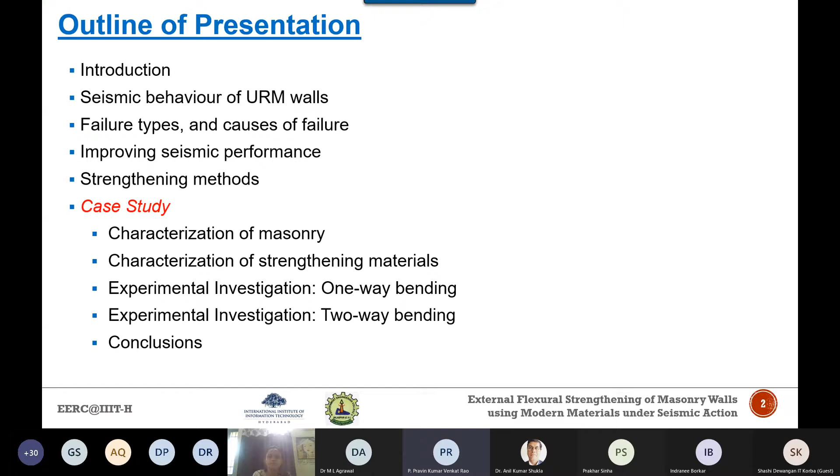We all know that since early civilization, unreinforced masonry has been the most widely used construction technique all over the world. Even today, despite the extensive use of modern construction materials such as concrete and steel, unreinforced masonry still represents a great majority of building stock in the form of residential, institutional, commercial, and public buildings, which also includes historical monuments and heritage structures of national importance, constructed all over the globe using unreinforced masonry.

In India, locally available materials such as clay bricks, adobe, stone units, concrete units, compressed stabilized earthen blocks, and even autoclaved aerated concrete blocks are most commonly used for unreinforced masonry construction. This masonry basically refers to a very vast spectrum of structural constituent materials and systems.

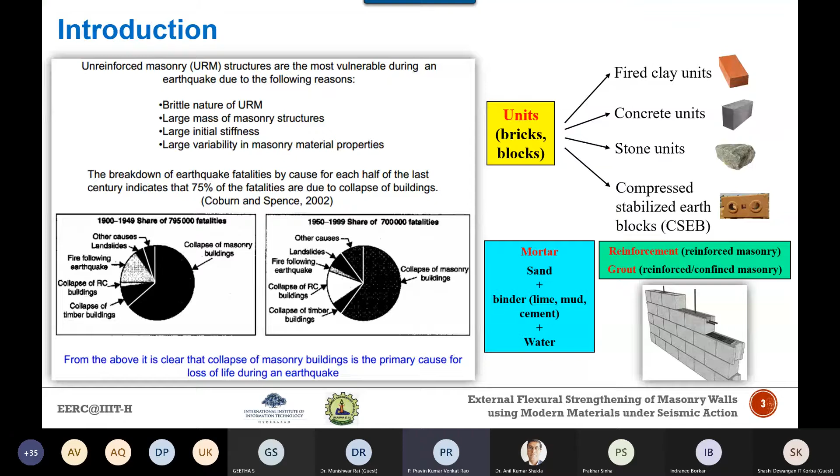Now, if you see, the majority of these constructions are made up of burnt bricks, stone masonry, or unburnt bricks. If you look at a country like India, 60 to 70 percent of our landmass sits in seismic zones 3, 4, and 5, which are called moderate to high seismic zones.

If you look at these structures, most of them will not have any seismic resistant feature. The earthquake resistance of this existing masonry construction in India is notoriously very poor, and therefore this type of construction is usually regarded as non-engineered construction. So in a country like ours, earthquake protection or risk reduction for the predominant majority of the population living in such constructions is really a big challenge. The existing housing stock of residential buildings, as you can see from building census data, constructed out of masonry with almost no earthquake resistant features, is really a worrying situation.

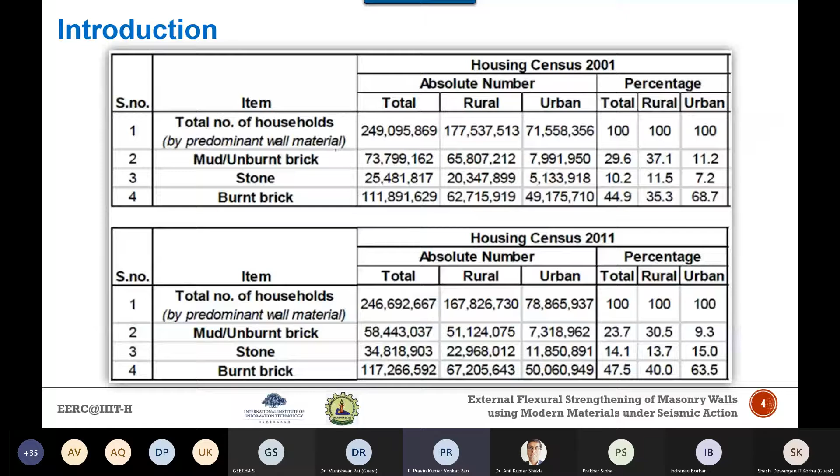Now if you see these masonry buildings, the main component is basically a load bearing structure. Let me tell you the basic difference between a load bearing structure and a frame structure. In the frame structure, we basically construct the beams and column framework, and all the masonry walls are considered as infill walls, or they basically act as partitions. The load is transferred from the upper floors to the beams, from beams to the columns, and columns to the foundation, where this masonry wall, constructed as infill material, does not contribute to any strength participation.

Whereas in case of load bearing structure, the load has to be borne by the wall.

I think it has stuck somewhere. Okay.

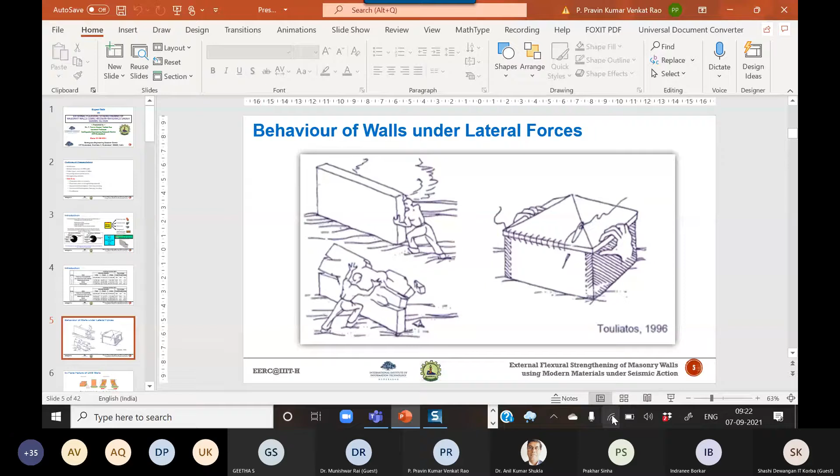As I was saying, the actual behavior of an unreinforced masonry wall during an earthquake is a complex combination of in-plane action and out-of-plane action. I will be explaining you this.

Now if you see during an earthquake, what exactly happens to a masonry building? During an earthquake, these unreinforced masonry walls may be either pushed sideways along their length or basically in the thickness direction.

The moment of inertia is a very good geometrical parameter that captures the bending strength. Imagine a wall, and if I take the bending about its x-axis, the moment of inertia comes out to be around T times thickness into L cube by 12. But if you take the same moment of inertia about the y-axis, it is around L times T cube by 12. Now if you take the ratio of bending strength about these two axes, you can see that IXX is almost 170 times more than IYY.

Considering an example of length of the wall as 3 meters and thickness of wall as 230 mm, this in-plane resistance of the wall is significantly larger because the depth of plane of bending in this axis is quite larger. So a person gets a lot of difficulty in pushing this wall about this axis.

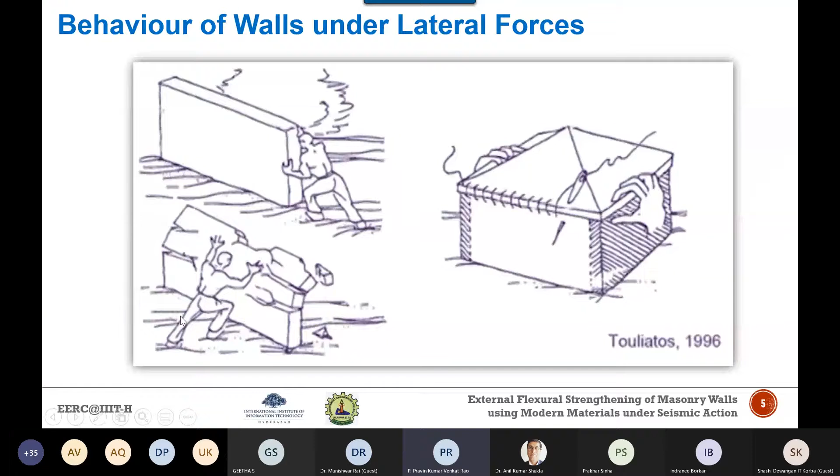This in-plane failure also depends on your aspect ratio. What is aspect ratio? It is basically the ratio of height to the length of the wall. This in-plane failure also depends upon your wall thickness, the compressive strength of your masonry as a material, the axial stress, and the pre-compression load, which is basically coming from the top stories.

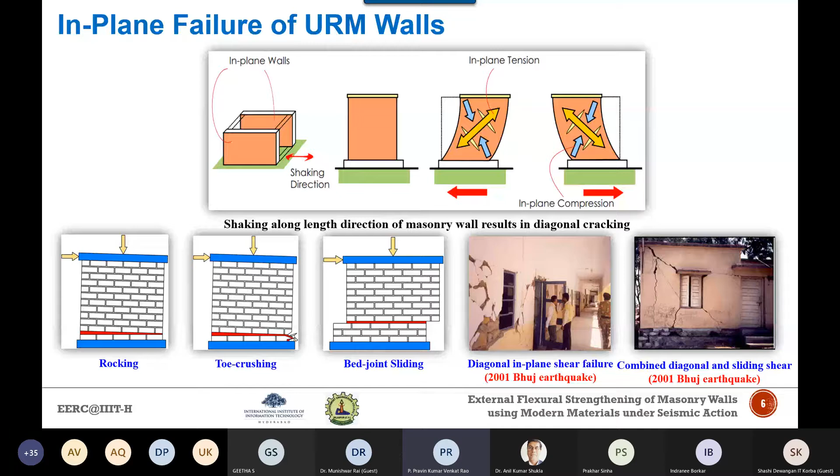Now, what is out of plane failure? When the direction of the lateral forces is along the thickness direction of the wall, the wall simply collapses. Why? Because the seismic resistance of the wall, by virtue of its weight and tensile strength of masonry, is very, very small.

Now, this out of plane failure is classified into two types. One is called one-way spanning walls and another is called two-way spanning walls. In case of one-way spanning, it undergoes uniaxial bending.

Just hold for a second. Yeah, sorry for the inconvenience.

So as I was saying, when the shaking is along the thickness direction, the wall simply collapses, as the seismic resistance of the wall, by virtue of its weight and tensile strength of masonry, is very, very small. This out of plane failure is classified into two types: it may be one-way bending or two-way bending, depending upon the boundary condition, which I will explain when I come to the case studies, how we define the one-way and two-way bending conditions. But at the moment, simply understand that this one-way and two-way bending is associated with the boundary conditions.

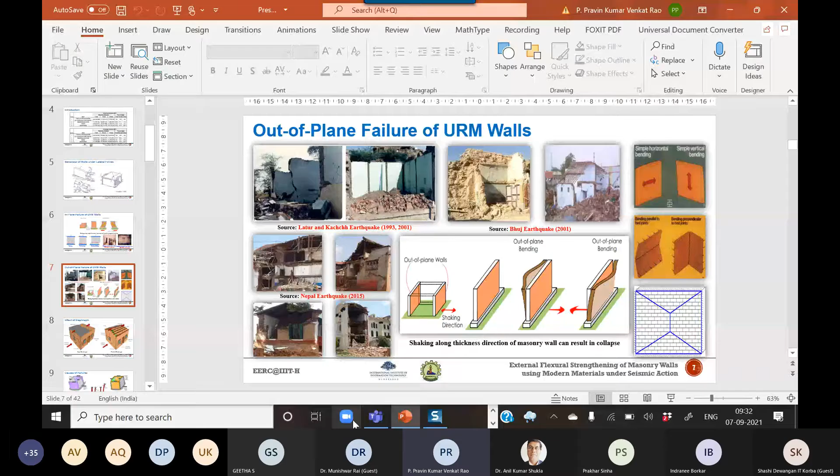Walls have especially failed in the out-of-plane failure mode. So whether you take an example of a Latur or Kachchh earthquake, or the Bhuj earthquake, or the Nepal earthquake, here you can see all the walls, when the earthquake or lateral force is in the direction which is perpendicular to the plane of the wall, cannot resist that particular force. That is because...

Here you can see that all the failure patterns show the masonry walls have been subjected to out-of-plane failures. Now let's move forward.

Now, these lateral forces which we have seen act in in-plane direction or basically in out-of-plane direction. There is also an effect of the diaphragm. In simple words, the diaphragm is nothing but the roof, or basically the floors. Now what happens is the seismic lateral forces basically originate in all the components of these structures, right? So it will be subjected to the vertical elements, that is my masonry walls, and second is my horizontal components, which is basically the roof.

And this component, there are basically two types of diaphragm: one is basically a rigid diaphragm, and another is the flexible diaphragm. The example of a rigid diaphragm is basically an RCC slab, reinforced cement concrete slab. And the best example of a flexible diaphragm is basically a sloping roof or pitched roof, which is not properly anchored to the masonry wall, and therefore it is flexible in nature.

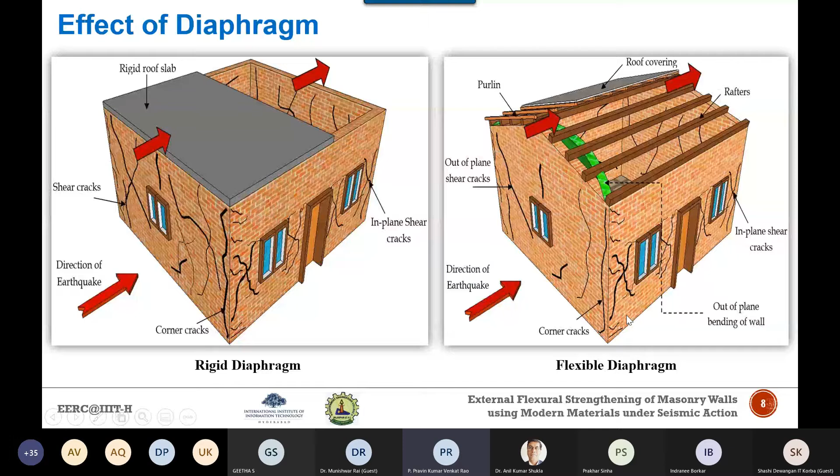So now let's understand what are the different causes of failures. We have already seen, let's understand in much more detail. If you see this horizontal inertia force, which is developed at the roof, it transfers to the walls, acting either in the weak direction or the strong direction.

Here I want to define, when I'm saying weak direction, it is basically the direction which is perpendicular to the plane of the wall. Let's say if this is my direction of earthquake shaking, and this force is perpendicular to the plane of wall B, then this direction is called my weak direction or the out of plane direction. Whereas when the same earthquake direction is parallel to the plane of the wall, wall A is called the strong wall or the in-plane wall, because it is much more stronger than wall B.

Now, another reason is, if all four walls are not tied together like a box, then the walls loaded in their weaker direction tend to overturn or topple. Therefore, to ensure good seismic performance, it is very much necessary that all walls must be joined properly together to the adjacent walls.

So in this way, if the wall is loaded in the weaker direction, then the weak direction walls can take advantage of the good lateral resistance offered by the walls loaded in the stronger direction. Further, the walls also need to be tied to the roof and foundation to preserve overall integrity. This is very important, and therefore several construction aspects are required to ensure this complete box action.

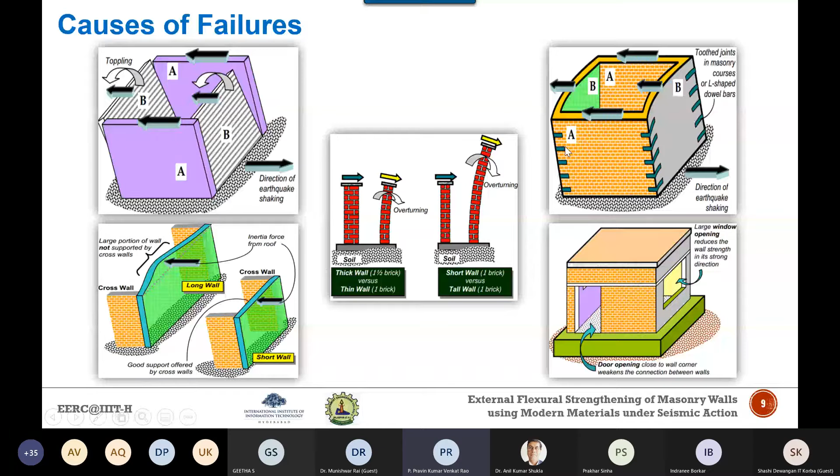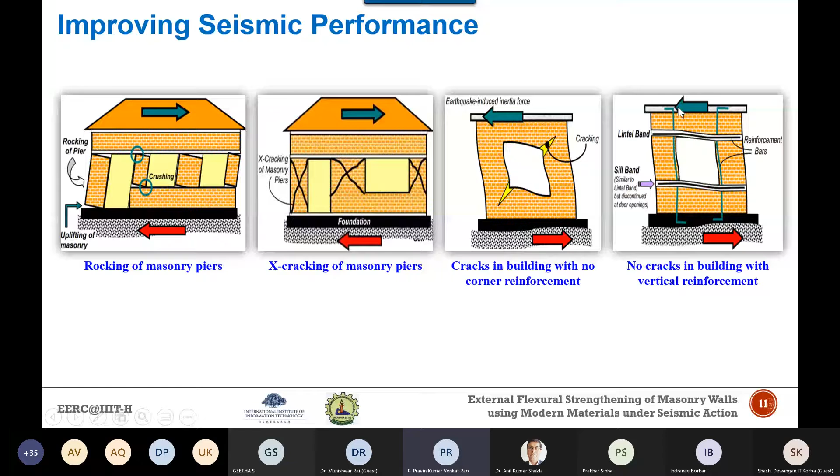But what about the existing buildings which have already been constructed in the past? What about their safety? You cannot embed the vertical reinforcement externally, you cannot provide the lintel band separately. For that, some special arrangement needs to be done, and for that, strengthening methods - external strengthening methods - come into picture, especially for safeguarding the existing buildings.

Now, a number of strengthening techniques using composite materials or modern materials have been evolved over the years to increase not only the in-plane but also the out-of-plane performances of the walls. In my case study, which I will be explaining later, I have focused on the out-of-plane behavior, but the same thing can also be assured in case of in-plane failures as well. The main function of providing this external strengthening is to enhance or increase the in-plane and out-of-plane performances of the wall.

And these techniques which have been used in the past, if you see, they not only enhance the strength, but also their deformation capacity and the energy absorption capacity of the walls.

So here you can see a polyester fiber, this fiber may be made up of different types of materials, like carbon fiber, glass fiber, aramid fiber, or natural fiber like basalt, hemp, sisal, cotton, or jute. These fibers are used as chopped fibers. When you use chopped fibers along with the cementitious matrix, the strengthening technique is called ECC, which means engineered cementitious composite material.

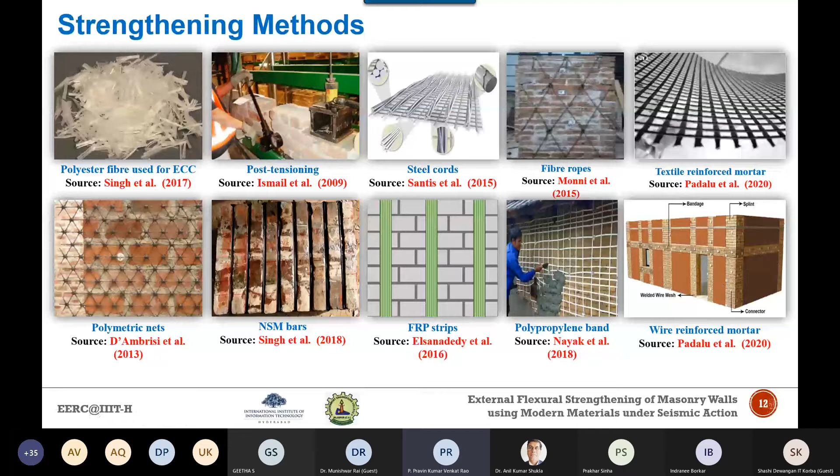So there are different techniques which have been used in the past. Now, in the case study, we have developed 3 effective and sustainable retrofitting techniques for unreinforced masonry buildings, especially for out-of-plane action. These 3 innovative, sustainable, easy to apply, and cost-effective retrofitting techniques have been tested, and their efficacy is validated using experiments.

Now, the first reinforcement which we have chosen is the welded wire mesh, this is a wire mesh, this is a fiber mesh, and another is the textile fabric. This wire mesh and fiber mesh has been used in conjunction with the inorganic matrix, meaning it may be a cement sand mortar, lime mortar, or any cementitious matrix. Whereas in the case of the textile, we have used a material called basalt, and in order to join this material to the masonry wall, we use a binding agent called organic matrix, which comes under the category of epoxy resins, especially epoxy hardeners.

Now, first we go to the testing of walls.

We have tested all the materials, and then characterized them at the component level, and then we will see at the structural level what tests have been done and what will be the strength difference between unreinforced and reinforced masonry. Then what is the strength enhancement, what is the deformation enhancement, what is the energy absorption capacity, that we will see in a while.

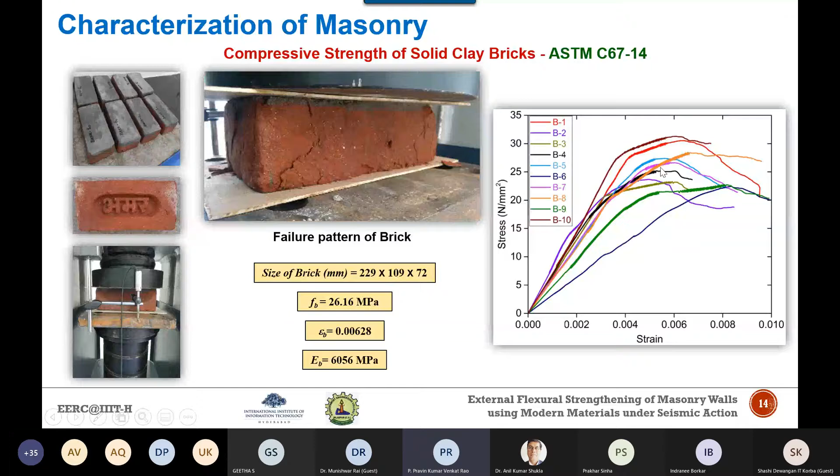It is simply the secant modulus. We took 33% of the ultimate strength, and then took the slope between 0 and that 33% of the compressive strength. So whatever value we got, the slope of that line gives you the modulus of elasticity — I'm referring to it as the secant modulus.

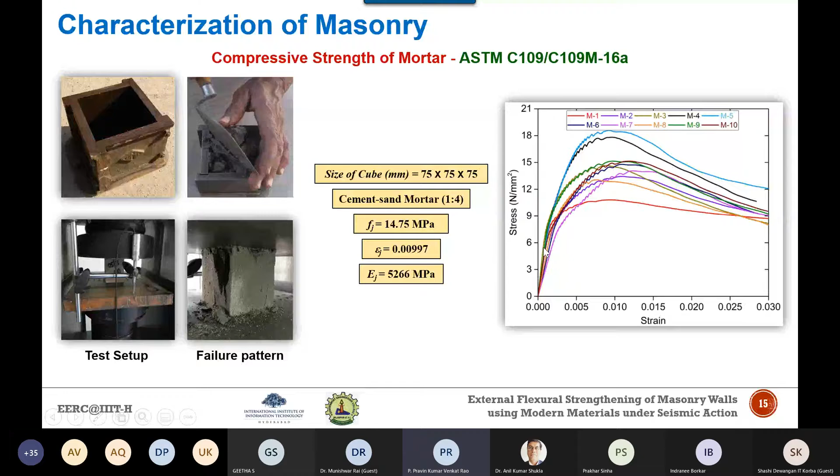Now next is the masonry. As I said, masonry is an assembly of a unit and mortar together, whereas in constituents we tested brick separately and mortar separately. Now let's understand what the behavior of masonry will be in assemblage.

So these failure modes have been defined as per the guidelines of ASTM. In layman's language, mostly the failures are associated with vertical splitting cracks.

This ASTM standard classification, identifying the local variation in crack patterns and spalling in different tested specimens, indicates that the material is not homogeneous. It is basically a heterogeneous material, with large variability in material properties, especially in masonry. So when we tested a masonry specimen of H/T ratio of 2.38, we got a compressive strength of 7 MPa, and the modulus of elasticity is in the range of 3375.

Now let's see the summary. We tested bricks with strength of 26 MPa, mortar cubes 14 MPa, and prism around 7 MPa. It is usually said that the masonry strength should come in between the brick and the mortar cubes. But here you can see that the masonry prism strength is comparatively lesser than that of the brick unit and the mortar when completely assembled.

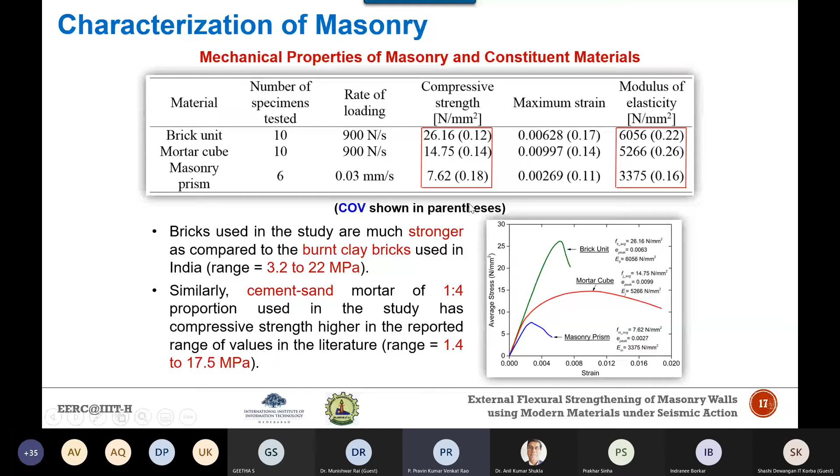Now, once we got these masonry properties, let's talk about the reinforcement. I talked about three different types of reinforcement: one is the wire mesh, another is the fiber mesh, and another is basically a fiber textile. Now let's understand the behavior of this reinforcement in tension, because this tension reinforcement is required.

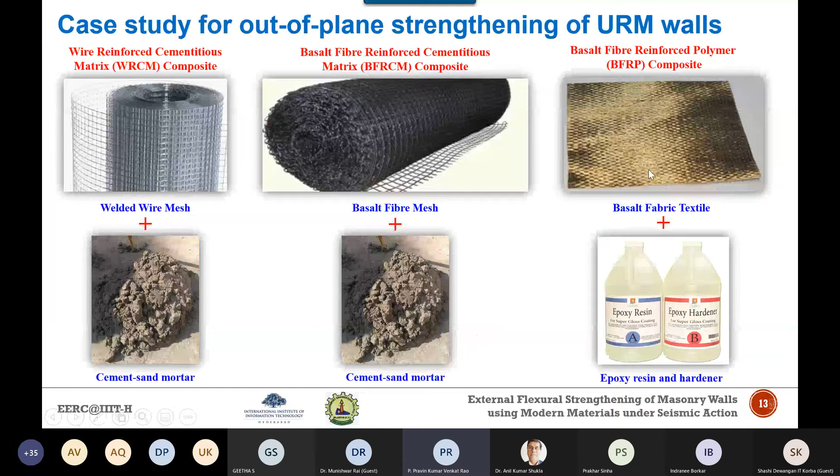As I said earlier, the biggest disadvantage of masonry is that it is very, very weak in resisting tensile strength. And in case of concrete also, why do we provide steel reinforcement? The main reason is to be more effective, especially in the tension zone, because concrete cannot take tensile forces — even if it can, it is in the order of 1/10th or 1/20th of its compressive strength. Therefore, we provide the steel reinforcement below the neutral axis.

Similarly, in case of masonry also, it is very strong in compression but equally weak in tension. Therefore, in order to enhance its tensile strength, we need to provide external reinforcement, especially in the tension zone.

Now we have tested 3 different types of materials. First is the bidirectional welded wire mesh, here you can see 2 grid spacings of 25 mm and 50 mm. Second is the bidirectional basalt fiber mesh, made up of basalt fiber yarns in warp and weft directions with 2 different grid spacings.

Now, according to AC 434 guidelines, you can see these brown color metal tabs have been bonded on both sides of the specimen, especially in the gripping zone, using an epoxy glue. This arrangement basically avoids damage to the specimen by the hydraulic grips in the test machine, and improves the stress transfer mechanism at the reinforcement mortar interface.

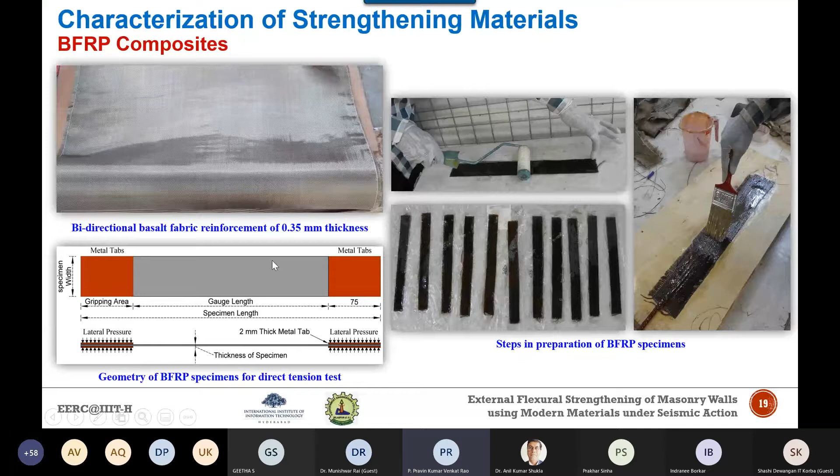Now let's come to the test setup and the test results. In the present study, clamp type grips have been provided to test the reinforcement and composite specimens in direct tension. These tensile forces have been applied using specially designed grips in order to avoid any slippage. So this is my wire mesh specimen, fiber specimen, then the composite specimen, and then the FRP specimen.

Now let's see the results. Here you can see these are the test results of the welded wire mesh and fiber mesh. From the stress strain curves, you can see that the wire specimens of the welded wire mesh have shown non-linear behavior, however with much lower ductility in comparison to structural steel and rebar, especially in case of the 25 wire mesh before the wires got ruptured.

Now, the fiber yarns of a roving have also shown linear stress strain curves and have got a brittle failure. Here in this curve, let me point, you can see there is a sequential load drop and again a regain in the stress strain curve, especially for this basalt fiber mesh. This is attributed to the progressive breaking of the individual fibers or yarns of a roving, and the difference in mechanical properties in the warp and weft direction is due to the influence of the weaving process.

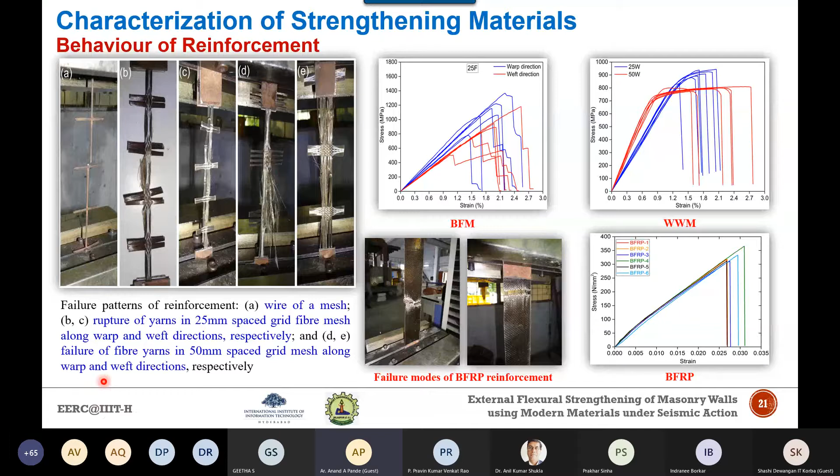If you see the FRP composite failure modes, the stress results of BFRP are quite repetitive and the stress strain curves are almost linear right up to the failure. Now next, if you see the test results, this tensile strength is basically obtained by dividing the load recorded by the cross-sectional area of the specimen.

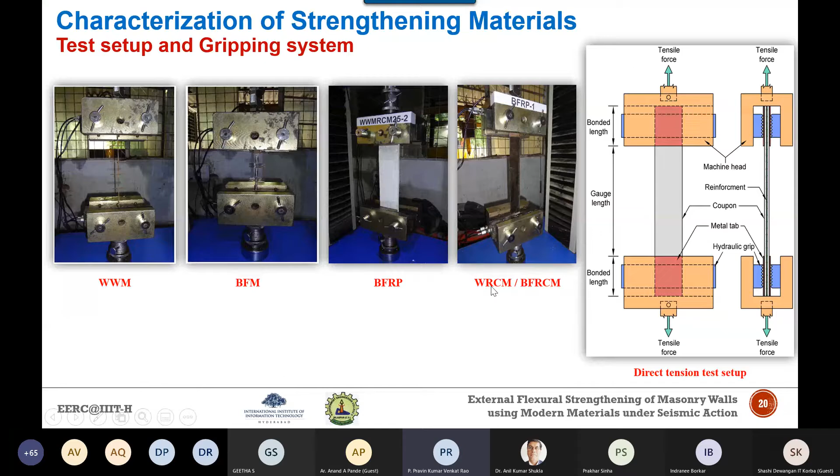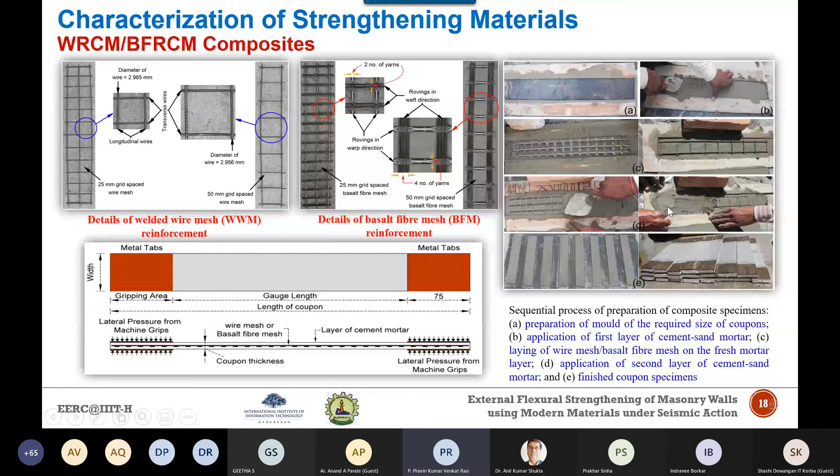Now let's see for the composite specimens. In case of wire reinforced, this WRCM represents the wire reinforced cementitious matrix. What is WRCM composite? This is the specimen where a wire mesh has been inserted between two layers of cement sand mortar plaster. Here you can see that the cracks have occurred along the width and have been distributed evenly over the full length of the specimen. But for a majority of these specimens, the failure has been caused by the sequential breaking of the wires inside the cementitious matrix. A very few specimens showed tensile failure of wires near the gripping area.

Here the blue lines basically show the test results of the dry reinforcement, whereas the red color stress strain curves, or the load displacement curves, represent the composite specimens. There is a reduction of 25% to 11% in strength compared to the dry wire reinforcement, whereas if you see the initial stiffness, they are almost in a very close match. So this reduction in strength can be attributed to the sequential failure of the multiple wires present in the coupons.

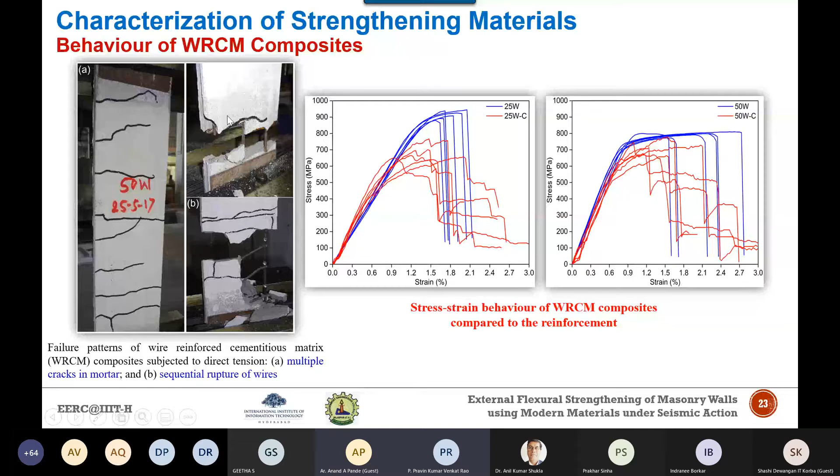Now let's talk about the same thing with the fiber reinforced cementitious matrix. In case of FRCM composites, in all the red curves compared to these blue curves, the slippage has occurred by numerous cracking along the width, which has been distributed homogeneously over the entire specimen length. The majority of the specimens have shown slippage between the mortar and the fiber mesh.

Except for one specimen, where the sequential rupture of the fiber yarns has been observed. The slippage is mainly attributed to the low bond strength of the interface between the mortar and the fiber mesh, and therefore there is a significant reduction in all the four stress strain curves. There is a significant reduction in the strength and stiffness of FRCM coupons compared to the dry fiber yarn, and this reduction can be attributed to the gradual slippage of the fibers.

Now we had talked about the compression behavior of the masonry and its constituents. We had talked about the tensile behavior of these composite materials, as a dry reinforcement and as a composite material, for the wire, fiber mesh, as well as for the FRP. Now let's apply this strengthening reinforcement to the actual masonry.

So for this, we have constructed two different types of specimens. These small specimens are usually called wallettes, W-A-L-L-E-T-T-E-S. These are not walls, these are wallettes, which are small size specimens.

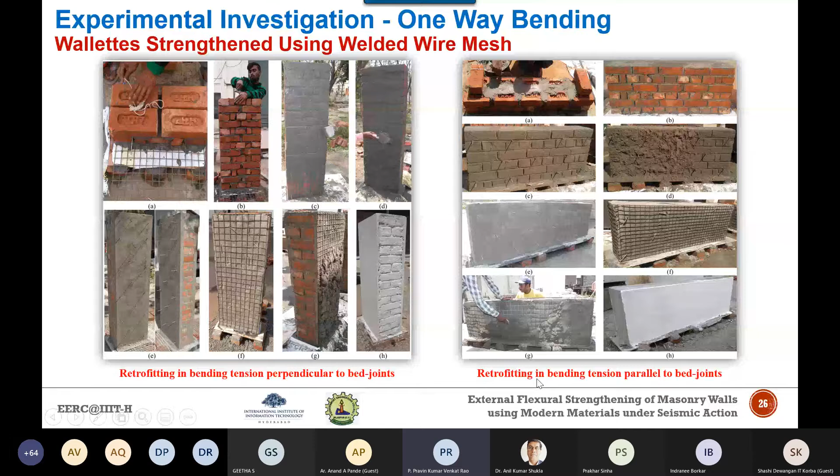Now, if you see the test results, we tested different types of specimens with varying reinforcement ratio. For bending tension perpendicular to bed joints, they failed either in sliding shear along the bed joint, or due to diagonal shear cracks joining the support and the loading line. Whereas some specimens strengthened with 50 mm wire mesh mostly failed in flexure, or in some cases sliding shear also took place.

So this shear failure—the sliding shear and diagonal crack patterns you are seeing—are mainly attributed to the fact that these were tested in horizontal position without any axial force, and the low shear span to depth ratio is also responsible for this shear failure. The main question is, when we are testing these masonry specimens in bending, why did this specimen fail in shear? In some cases there is flexural failure, but in others shear failure occurs. The main reason is the low shear span ratio.

It is interesting to note that the flexural failure is brittle. If you see the load displacement curves for flexural failure, they are much more brittle, whereas the shear failure has got some ductility. This is also related to how the strengthening reinforcement failed. This brittle flexural failure is accompanied by rupture of the wire mesh and can be attributed to a very low reinforcement ratio, resulting in a very shallow depth of the neutral axis. Whereas in case of shear failures, the gradual sliding has been resisted by the catenary action of the welded wire mesh, resulting in slightly ductile failure.

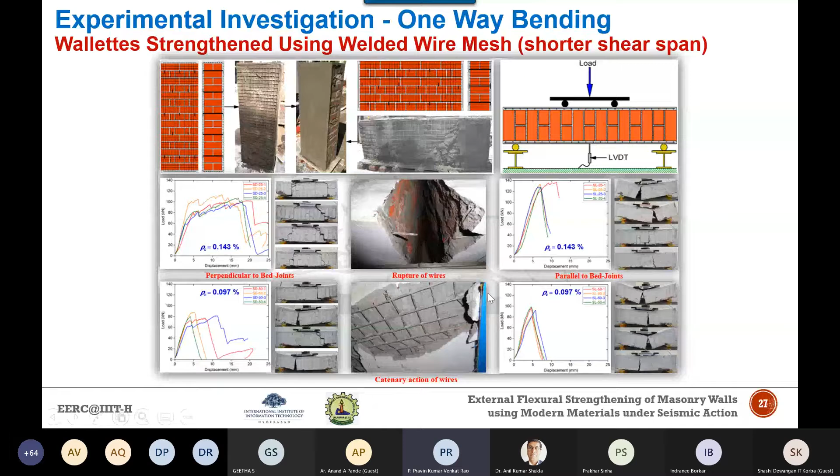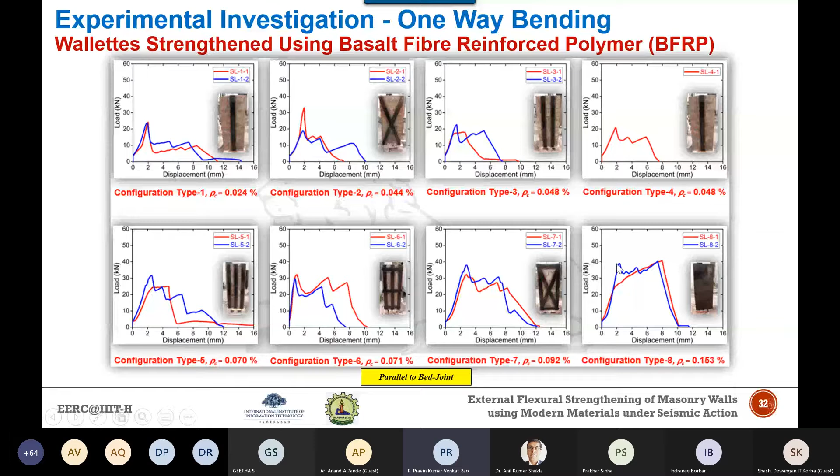But in FRP, three different types of failure modes have been observed. Either FRP rupture took place, attributed to relatively better bond characteristics, or debonding occurred. This is also a rupture failure. Here you can see that there is a debonding.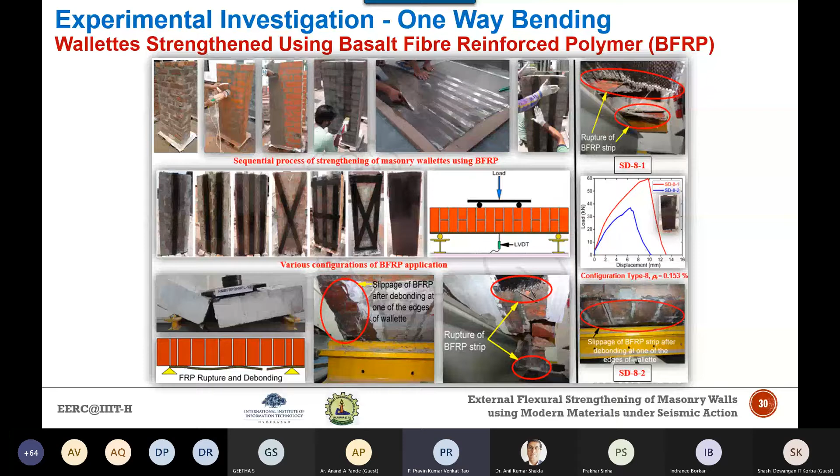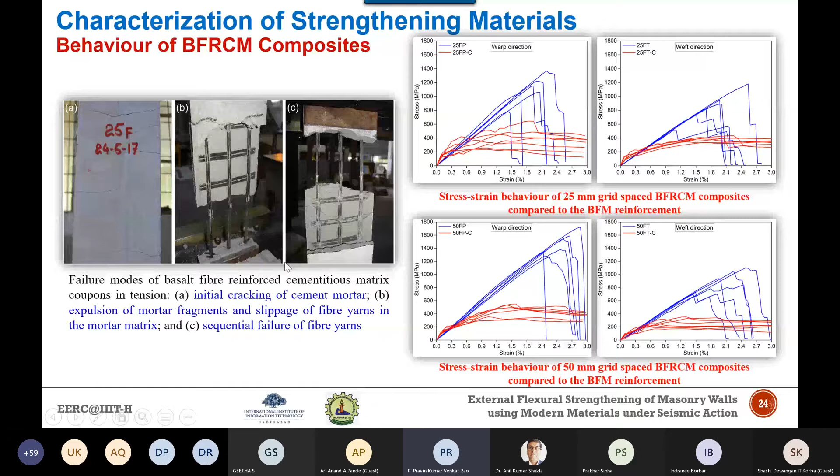All these specimens which I showed have been tested in 4-point bending. Here you can see there is no axial load, and therefore this is a case of one-way bending.

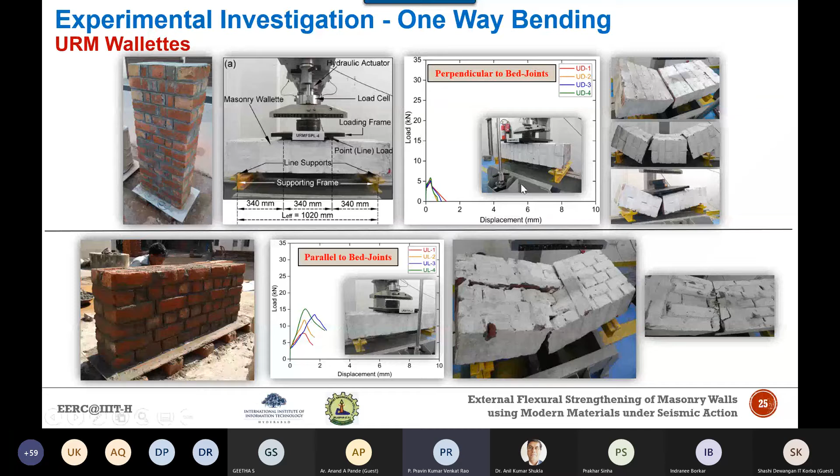Now let's talk about the two-way bending. This is very important, the two-way bending condition.

To understand this behavior of masonry walls, especially in two-way bending, this H-shaped masonry wall, a full-scale wall where the length is 3 meters and the height is about 3 meters, was constructed. This main wall and the cross walls have been interlocked at the junctions using staggered overlapping bricks, and here you can see the toothing connection has been developed.

So as we tested for the one-way bending with 3 different types of specimens, we have shown what the strength and deformability capacities are.

Now similar techniques have been applied at the structural level, especially on masonry walls, using 3 different techniques: one is the welded wire mesh, another is the basalt fiber mesh, and another is the fiber reinforced polymer.

Okay, so let's discuss how we have applied these and then we will go to the results. Now in case of the welded wire mesh strengthening technique, the masonry wall has been retrofitted using wire mesh.

Here you can see there is a first layer of plaster which has been laid along the length of the wall, similar to the lintel band which we discussed earlier, but the lintel band is usually provided especially for new buildings. For an existing building, we are externally providing these seismic belts.

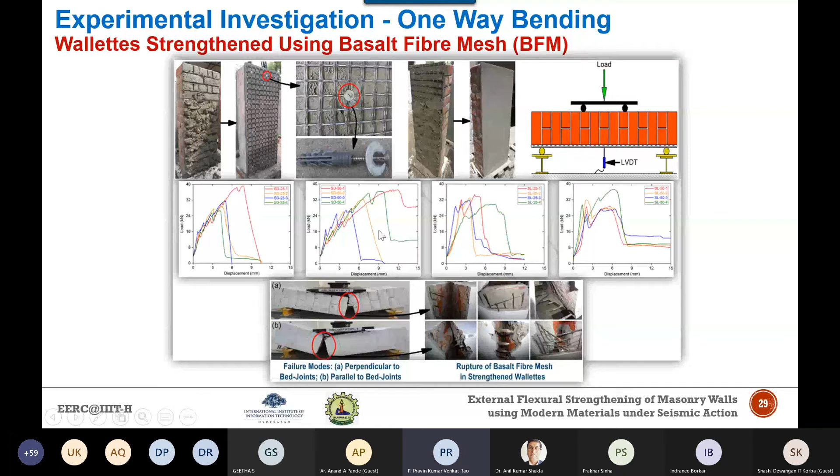Now in case of the FRP composites, the FRP has been applied on both faces of the wall, similar to that of the welded wire mesh, in form of a horizontal bandage at the lintel level, where we have provided a vertical bandage as well as the horizontal bandage. So the vertical bands or belts are specially called splints. The vertical FRP you are seeing is called a splint, and the horizontal component of the strengthening reinforcement is specially called the bandage. Here you can see the BFRP vertical splints and then the BFRP bandage.

In welded wire mesh and the basalt fiber mesh, we have used the inorganic matrix, cement sand mortar, whereas in case of the FRP, we had applied this strengthening technique using the epoxy resin and the hardeners.

Now here you can see that the test wall notations are suffixed by a letter F and the letter S. This F and S indicates the boundary conditions, especially at the top edge of the wall. The F is indicating the walls with integral support at the top, which is obtained by constructing an RCC slab by pouring the concrete directly over the wall. This represents my rigid diaphragm condition, which I had discussed earlier.

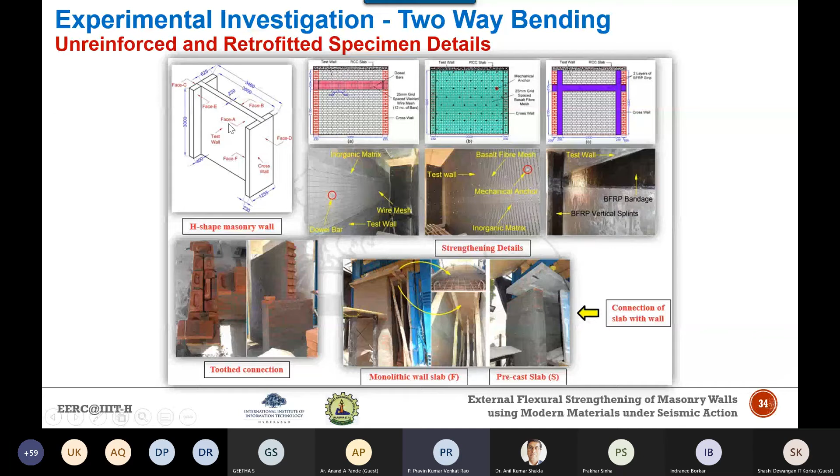Here you can see this is a reaction frame consisting of 4 columns which are connected by these steel beams in the loading direction, and there is a steel beam especially in the transverse direction. So 4 columns, 2 steel beams provided in the loading direction, and the two steel beams provided in the transverse direction.

All the members of this reaction frame have been connected using high strength friction grip bolts, and the columns have been connected to this concrete floor using these anchor bolts. Now here you can see that especially in the columns the stiffeners are provided, even in the beams the stiffeners are provided. The main reason is that all the points where concentrated forces are acting.

Now if you see, the lateral movement of the RCC slab at the top of the wall has been restrained using these 4 steel rods, between the slab and the reaction frame, and this hydraulic jack has been used to apply a pre-compression load from the top. And to distribute the vertical load uniformly in the test wall, a steel beam has been attached to the top of the RCC slab along the length of the main wall.

And this lateral load has been measured using S-type load cells, which have been attached between this backing frame and the reaction frame at the 4 reaction points. Displacements have been measured using 4 LVDTs, 2 at the front side of the wall and 2 on the other 2 ends of the wall. To minimize the leakage or friction underneath the backing frame of the applied load, the backing frame has been supported on rollers and ball bearings. And the lateral load, the most important part, has been applied using these airbags.

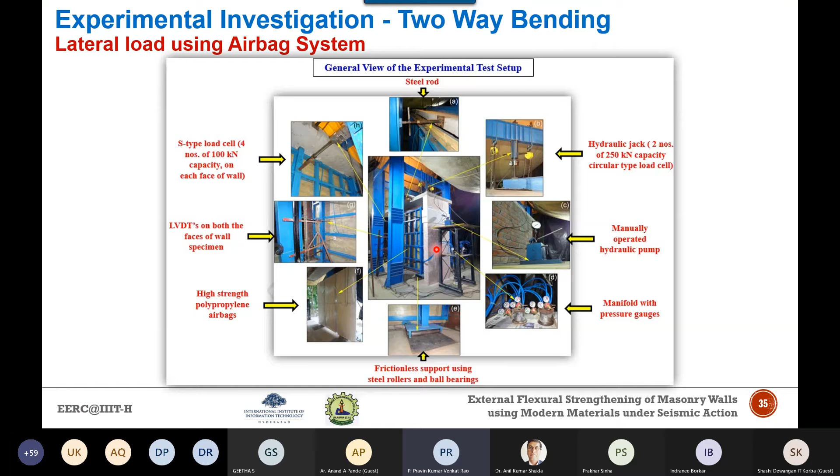Once air is passed onto these airbags, they inflate and apply a lateral load on this masonry wall.

The salient feature of this test setup is that there is a provision for application of pre-compression load, as well as a provision for application of uniformly applied load.

Here you can see this backing frame, and just beside it, 6 airbags have been applied. This backing frame is placed very close to the wall so that the airbags inflate and apply a uniform thrust, in the form of a uniformly distributed force, to the masonry wall, causing it to fail in the out-of-plane lateral direction.

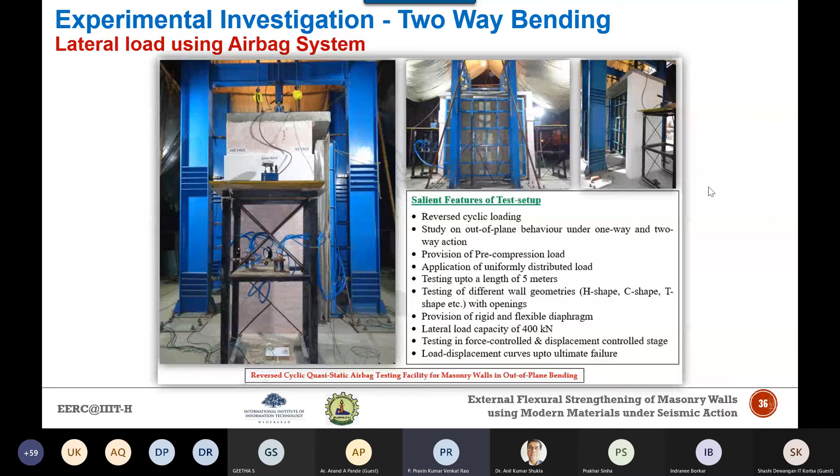All 5 walls I mentioned are: the unreinforced masonry wall; second, the welded wire mesh wall with S indicating a flexible diaphragm condition; the welded wire mesh with a rigid diaphragm condition; the basalt fiber mesh wall; and the FRP wall, both constructed with rigid diaphragm conditions.

All 5 walls have been subjected to an identical quasi-static reversed cyclic loading.

Here you can see the plan of the test setup, where this is my main wall, these are my 2 cross walls, and these pink areas are my airbags, which are connected to this backing frame.

Since in the time history there is a to and fro action, this has been simulated in the real field. One push is applied on one side, then the backing frame is taken to its initial position, and on the other side again a push is given, like a cyclic behavior with to and fro actions at different intervals.

The load has been applied to the wall in 2 phases. One is the pre-cracking phase, consisting of the first half cycle of load up to significant cracking of the wall, i.e. a well-defined collapse mechanism. The second is the post-cracking phase, consisting of a reversed cyclic load with the displacement loading history.

This pre-cracking phase, shown in blue, is applied till significant cracking is achieved. Once that is achieved, we apply to and fro action of the airbags to develop this hysteretic curve. This pre-cracking phase represents a force-controlled stage in which pressure in the airbags is gradually increased until the wall depicts a clear cracking pattern, to determine the pre-cracking strength.

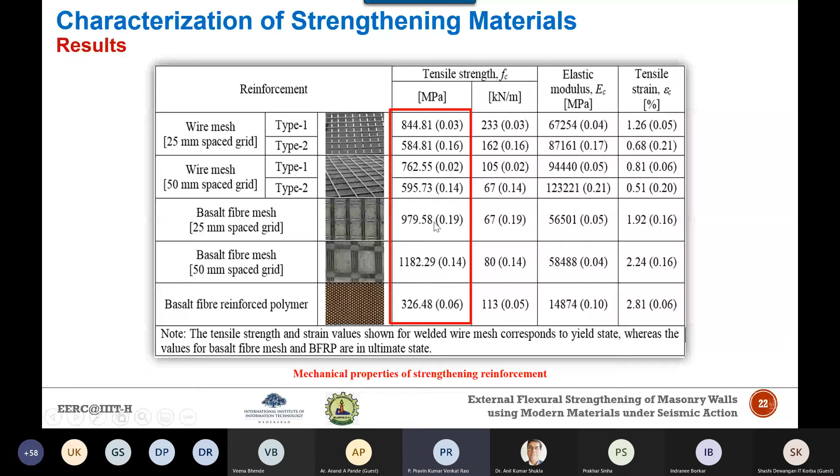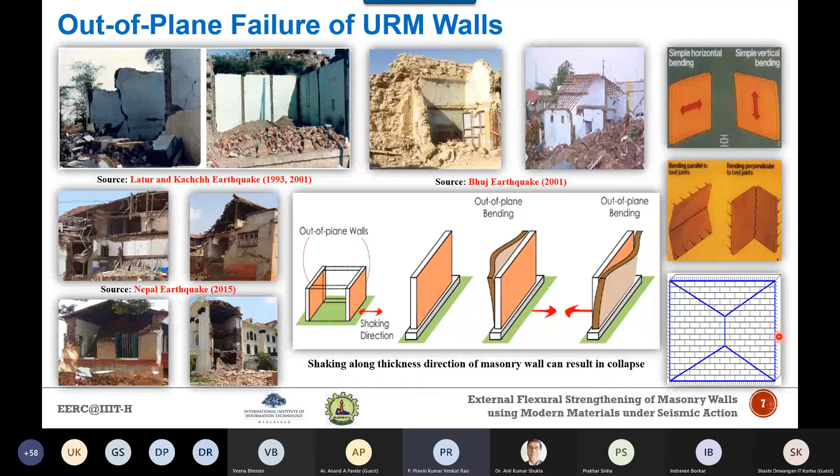This is my case of two-way bending, where all 4 edges are restrained. There will be vertical cracks, a combination of horizontal cracks along with diagonal crack patterns, and they all appear almost near the corners. Similarly, in the real test, we saw similar cracking patterns.

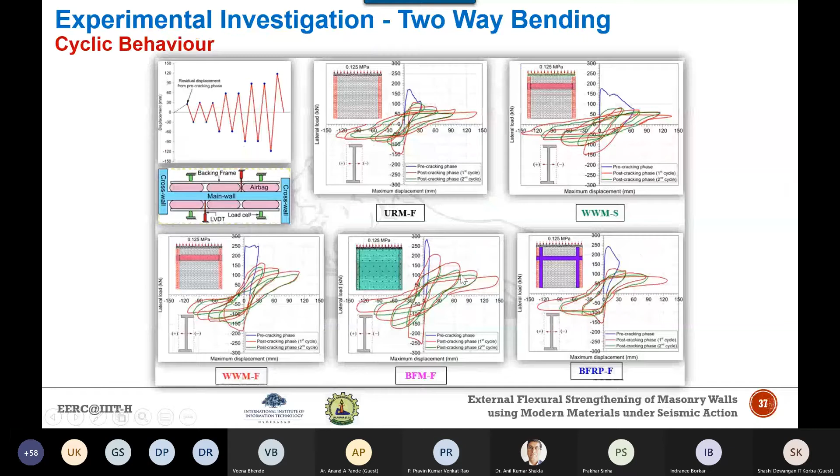However, in this case, the diagonal cracks did not originate directly from the corners of the test wall. Now in case of this welded wire mesh wall, there are two cases: one with the rigid diaphragm, another with the flexible diaphragm. Here you can see that the cracks developed parallel to the horizontal band, and the wall has divided into two distinct zones.

See, this is my band, and all the cracks are occurring just beneath the band, whereas at the top there are only horizontal cracks. Here you can see that top photograph just above the band - there are no diagonal cracks, only horizontal cracks you can observe. Whereas classical diagonal type crack patterns have developed just beneath this welded wire mesh. So it means that in this case, the welded wire mesh has not ruptured.

However, in case of welded wire mesh with the flexible diaphragm condition, a vertical crack has propagated through the band and the reinforcement, shown in a clear picture. So in this particular condition, the wall has been distinctly divided into two zones - zone 1 at the top and zone 2 at the bottom - when you provide the rigid diaphragm condition. But in case of the flexible diaphragm, it behaved totally differently, where there is no strength enhancement. I will show you through the bar chart, through the graphs, that the strength enhancement in case of the flexible diaphragm is very less, even similar to that of the unreinforced masonry. This is because in case of the flexible diaphragm, as I said, there is a lack of anchorage connection.

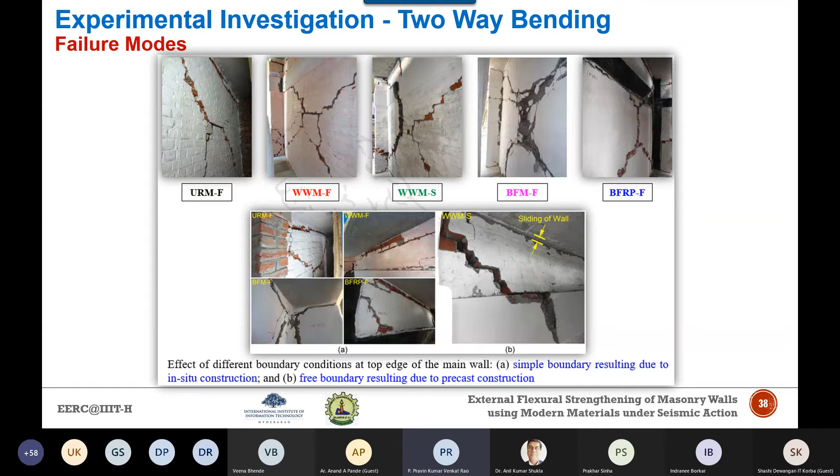Now if you see all these graphs, there is clear evidence of increasing pre-cracking strength and stiffness. See, here the unreinforced masonry strength is just around 170 kilonewtons. For wire mesh, the strength has increased. For fiber mesh, even for the FRP, the strength has increased. Not only the strength, similarly you can see also for the stiffness part. So there is a tremendous increase in strength and stiffness, except for the wall with the flexible diaphragm condition - here there is no strength increment.

However, since we have applied the welded wire mesh, its stiffness got increased. But because of the diaphragm condition, the strength hasn't increased. So this shows that the boundary condition plays a very important role in the load carrying capacity.

Amongst all the retrofitted walls, the basalt fiber mesh wall has shown the highest increase in strength and also the highest increase in stiffness, because the entire wall has been covered with the reinforcement, whereas in other cases only strips of finite width of reinforcement have been provided.

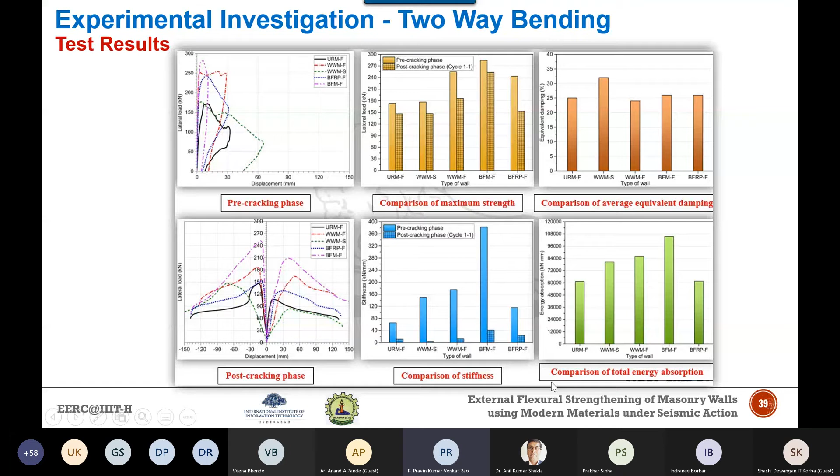So the main conclusion is, if you have any existing building and want to strengthen or retrofit it, we can use composite materials like wire mesh, textile reinforced mortar, and fiber reinforced polymer very effectively, where not only is there strength enhancement, but also large ductility and large energy absorption capacity.

Secondly, whether you test the masonry walls in one-way bending or two-way bending, there will be a significant enhancement. The two-way bending represents a more realistic picture about the boundary conditions.

But if you want to design any new unreinforced masonry building, let's say a 2 or 3 story building, it may be a low-cost housing building. In such cases, you need to make sure that the buildings must have earthquake resistant features.

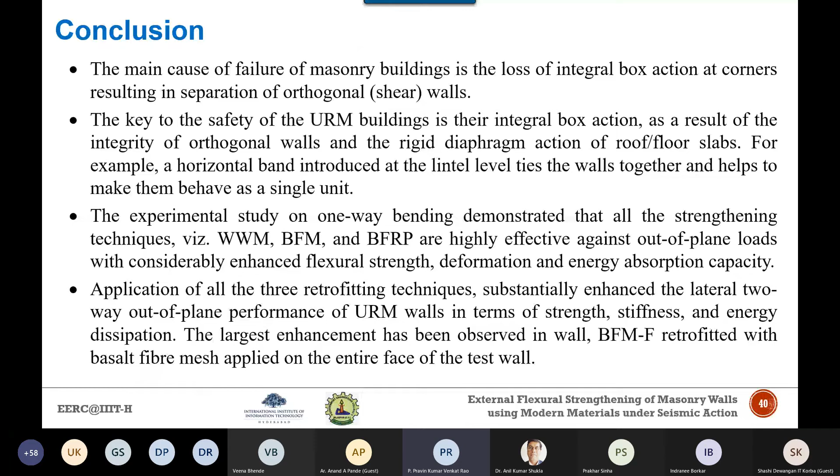Especially in terms of the connections, all the walls must be tied together in order to have the box behavior, so that the integrity of the walls can be achieved.

Another very important point is providing the seismic bands. If you provide the seismic band, the box behavior can be achieved and the buildings will behave satisfactorily, especially in case of large earthquakes.

So we have seen that not only in case of existing buildings, but also in case of new buildings, there is an urgent need to design them to be earthquake resistant, because as I said, they cover almost 75 to 76% of the entire building stock in India.

It may be schools, colleges, industrial buildings, residential constructions, or structures of historical importance. So studying this masonry and understanding its behavior is the need of the hour.

This also opens a new area apart from concrete structures and steel structures. Masonry is a gray area where there is a lot of scope to do research and understand the behavior properly, so that as a structural engineer or designer, we can design buildings to make them earthquake resistant and safeguard the large existing housing stock, especially in our country.

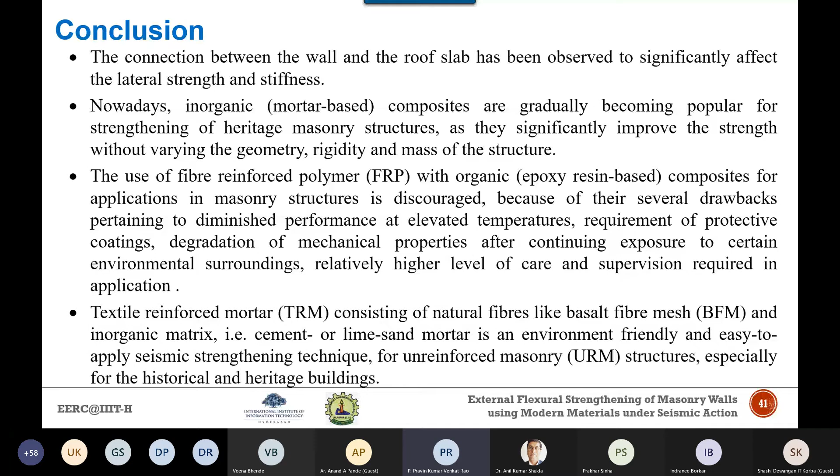So with this, I will conclude my presentation, and I'll be very happy if you have any questions. I would like to answer them in detail.

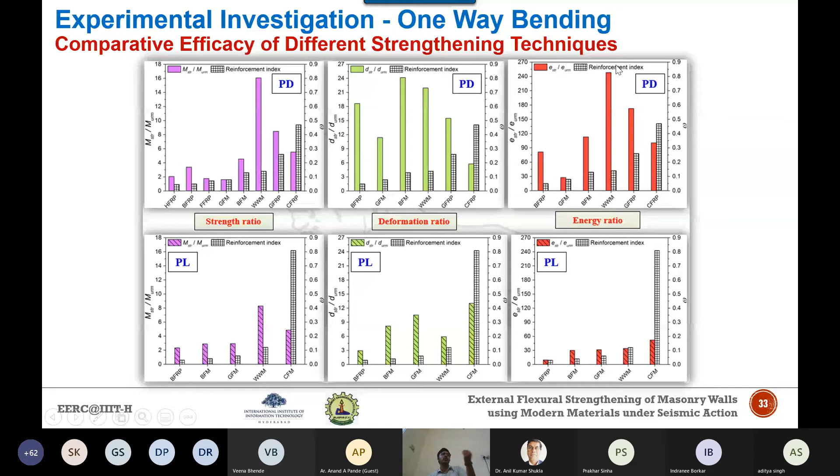So not only is it economical, but it is also easy to apply. But there are few problems related to FRP, especially related to the debonding failure mode, where the tensile strength is not fully utilized, and there is also a problem of application. Since this is an organic matrix, this needs to be taken care of under strict supervision.

So I will basically prefer the welded wire mesh compared to the other two techniques. FRP is already extensively used for concrete structures, but for masonry, FRP is nowadays discouraged because of debonding failure modes. So the current trending techniques where ongoing research is focused are TRM, textile reinforced mortar, and welded wire mesh. I hope it's clear to you.

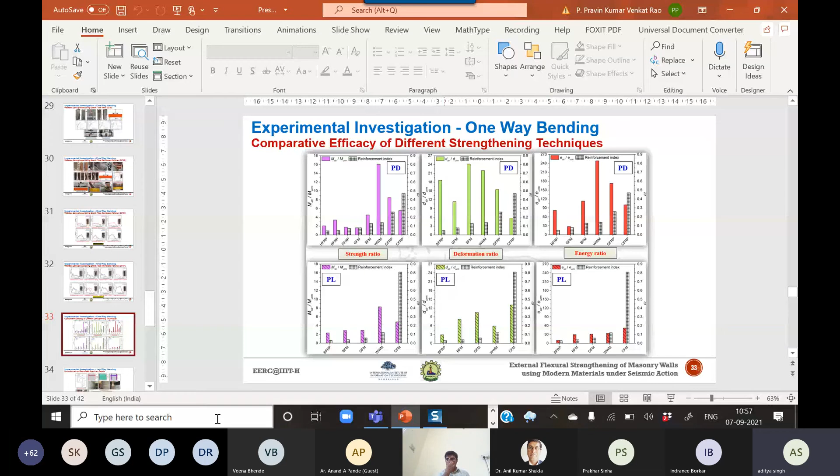One more thing I want to ask: when we apply this mesh and then put the plasters, we have a terminology called shotcreting. So applying directly by the workers versus applying via the shotcreting technique gives good strength in particular scenarios.

That's absolutely correct. You are talking about the application of inorganic matrix to the masonry substrate. In the pictures, what I have shown is the hand lay-up procedure. Shotcreting is a mechanized procedure. The only thing you need to keep in mind is that there must be a proper cover, or a slight gap, when dealing with this wire mesh.

We usually keep, let's say, a 10 or 11 maximum cover that needs to be maintained, because when you apply the first layer of plaster, that layer acts as a cover. But in case of spray grouting or shotcreting, you need to make sure there is some gap so that the entire mortar goes inside, into the porous nature or grids of the wire mesh or fiber mesh. That is the only thing you need to keep in mind.